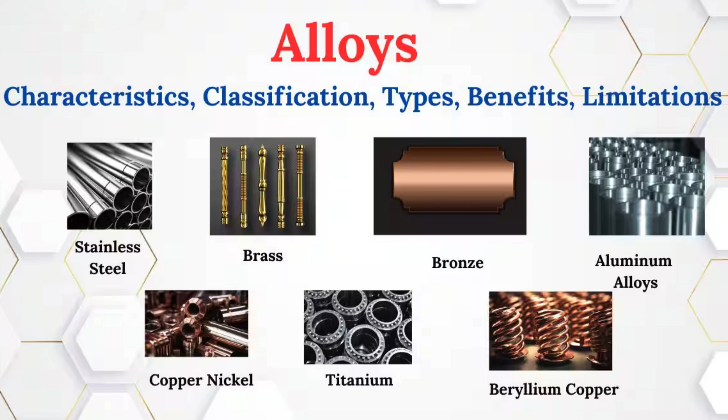Metal alloys are engineered metallic systems in which controlled additions of one or more elements modify the crystal structure, phase constitution, microstructure, and ultimately the properties of a parent metal. From ancient bronze to modern nickel-based superalloys and high-performance titanium and aluminum alloys, alloy development has been central to technological progress. Alloy performance is governed not simply by chemical composition, but by solid solution strengthening, phase transformations, precipitation, grain refinement, thermomechanical processing, and heat treatment.

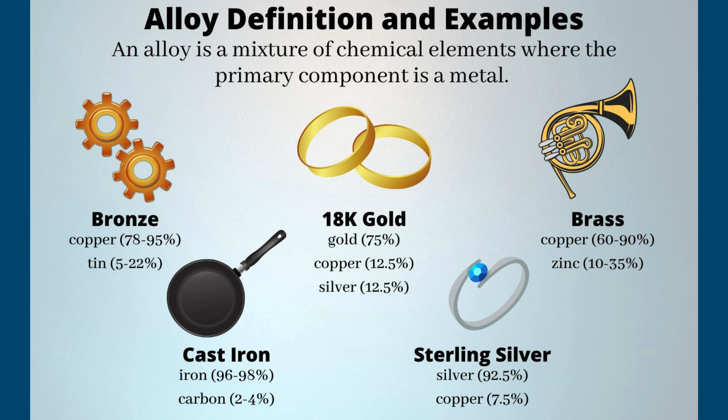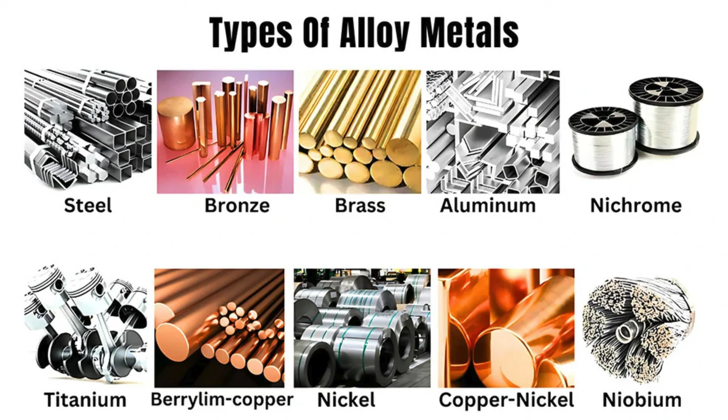An alloy is a metallic material containing two or more chemical elements, at least one of which is metallic. Alloying is fundamentally an exercise in controlling structure and properties. Relatively small compositional changes can alter phase stability, defect mobility, corrosion behavior, strength, ductility, conductivity, and thermal stability. Consequently, commercial alloy specifications generally define not only chemical composition, but also product form, processing condition, heat treatment, and mechanical property requirements.

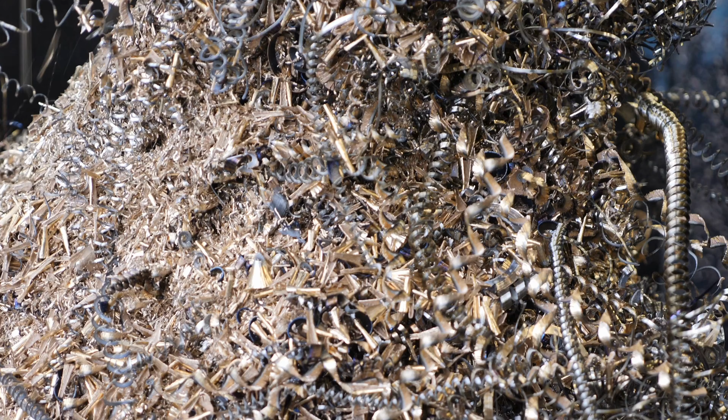The modern understanding of alloys is rooted in physical metallurgy, particularly the relationships among composition, thermodynamics, kinetics, microstructure, and properties. Standard materials science treatments emphasize phase diagrams, diffusion, dislocations, strengthening mechanisms, phase transformations, and processing as interconnected aspects of alloy behavior.

Historical development of alloy technology.

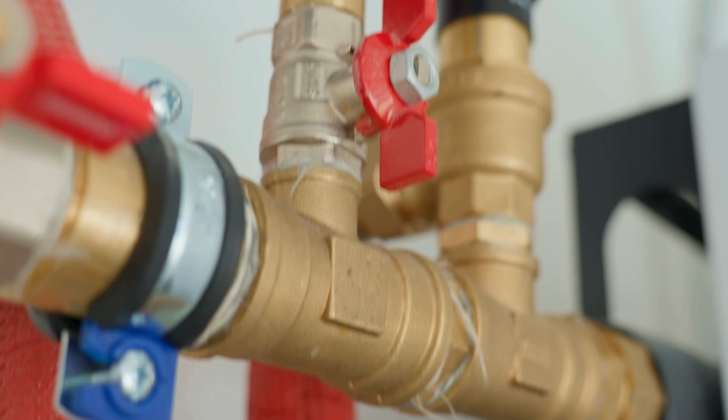Alloy metallurgy predates modern scientific understanding by thousands of years. Bronze, principally a copper-tin alloy, represents one of the earliest intentionally produced engineering alloys and provided harder and more useful tools than copper alone. Brass, primarily copper-zinc, subsequently became important because it combined strength, corrosion resistance, machinability, and attractive appearance. The development of iron metallurgy eventually displaced bronze for many structural applications and established ferrous metallurgy as the foundation of industrial civilization.

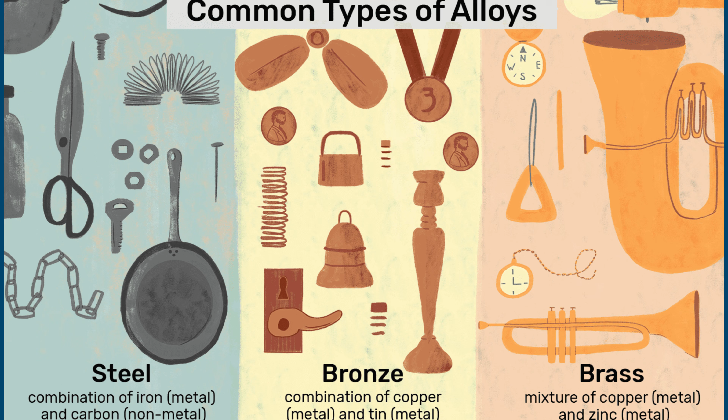The Industrial Revolution accelerated the development of cast iron and steel. Control of carbon content and later additions of chromium, nickel, manganese, molybdenum, vanadium, and other elements enabled steels with systematically tailored strength, hardness, toughness, hardenability, and corrosion resistance.

The 20th century then produced a remarkable expansion of non-ferrous alloys, particularly lightweight aluminum and titanium alloys, and high-temperature nickel-base superalloys. A major conceptual advance was the recognition that alloy properties could be controlled through microstructure rather than composition alone.

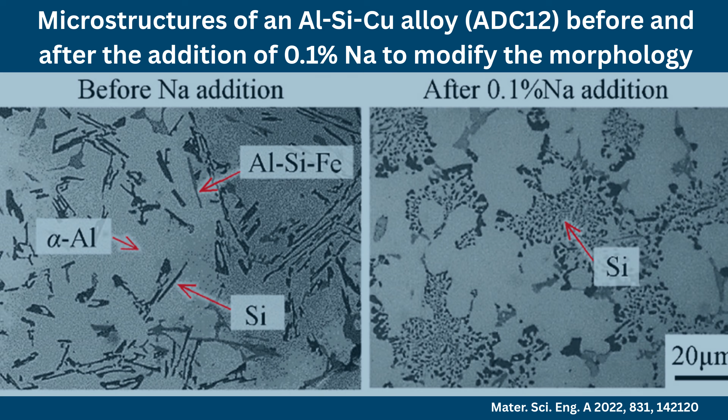The discovery of precipitation hardening in aluminum-copper alloys, associated with the development of duralumin, established a foundation for modern age-hardening alloys. Subsequent studies by Guinier and Preston established the structural basis of the nanoscale Guinier-Preston zones responsible for early-stage precipitation strengthening.

Fundamental classification of alloys.

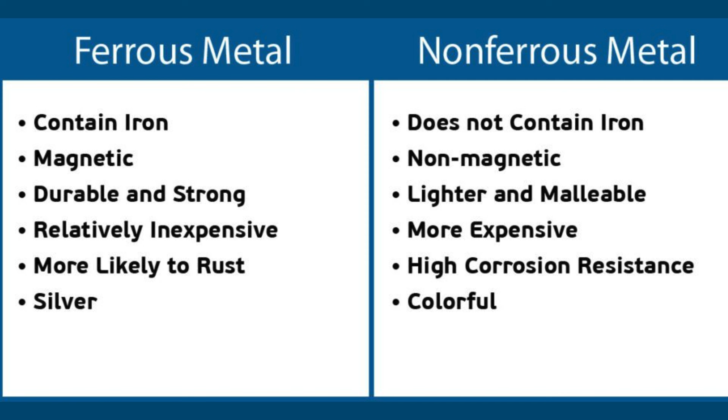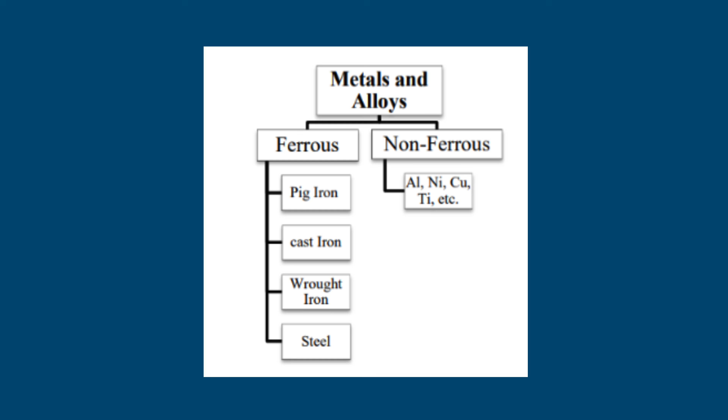Alloys are broadly divided into ferrous and non-ferrous systems. Ferrous alloys are based primarily on iron and include carbon steels, alloy steels, stainless steels, and cast irons. Non-ferrous alloys include aluminum, copper, nickel, titanium, magnesium, zinc, tin, and precious metal-based systems.

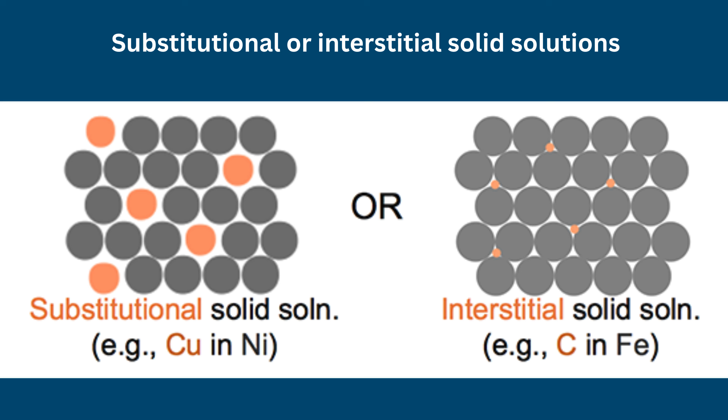At the atomic level, alloying elements may form substitutional or interstitial solid solutions. In substitutional alloys, solute atoms replace atoms of the solvent lattice, as in copper-zinc brass. In interstitial alloys, smaller atoms occupy interstitial positions. Carbon in iron is the classic example.

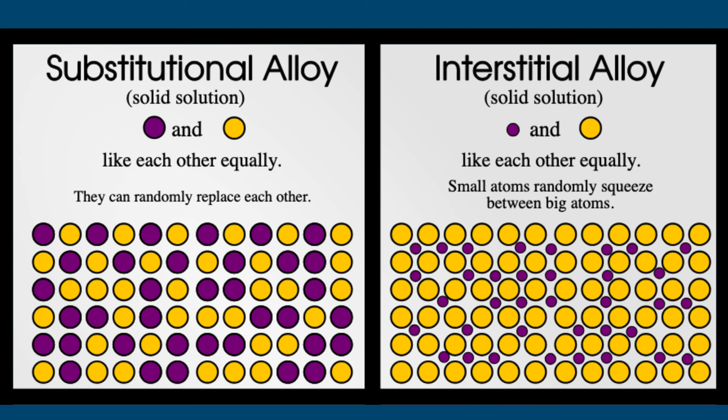The resulting strengthening can arise through several mechanisms. Solid solution strengthening results from lattice strain generated by solute atoms. Grain refinement increases strength through the Hall-Petch relationship, established independently by Hall and Petch. Precipitation strengthening occurs when finely dispersed second phases obstruct dislocation motion. Additional strengthening mechanisms include work hardening, transformation hardening, and ordering.

These mechanisms demonstrate why the processing structure-property relationship is central to metallurgy. Two alloys with nominally similar compositions can possess substantially different properties because of differences in grain size, precipitate population, phase distribution, texture, and defect density.

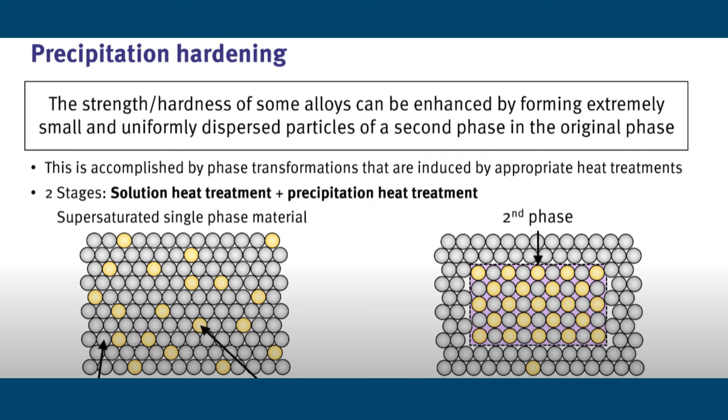Ferrous alloys. Carbon and low alloy steels.

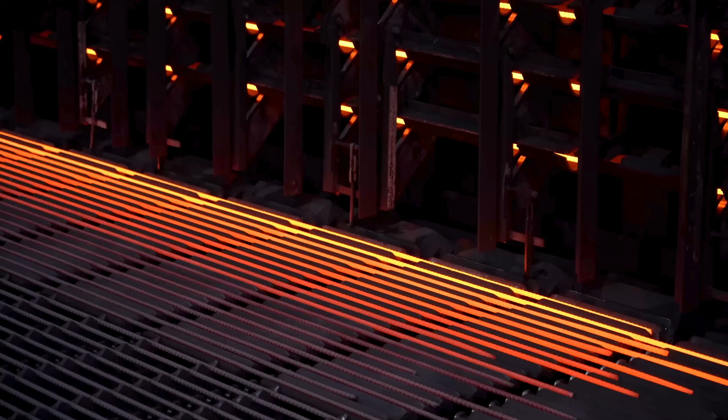Steel remains the most important engineering alloy family because it combines strength, toughness, manufacturability, weldability, availability, and relatively low cost. Conventional steels contain iron and generally less than approximately 2 weight percent carbon, together with manganese, silicon, and, depending on grade, chromium, nickel, molybdenum, vanadium, tungsten, or other elements.

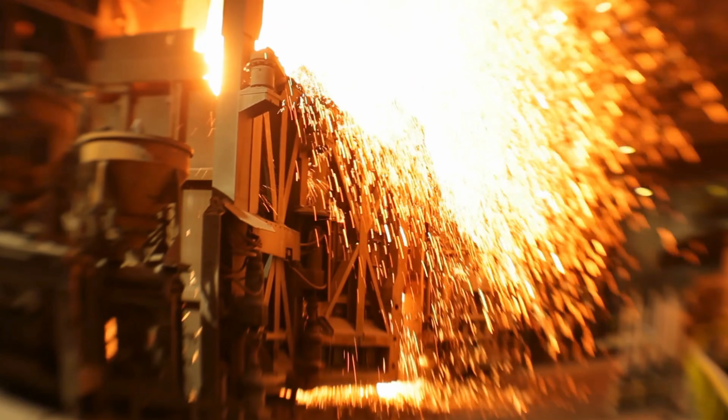Carbon content strongly influences hardness and strength, whereas heat treatment provides extraordinary control over microstructure. Austenitization followed by controlled cooling can produce ferrite-pearlite, bainite, or martensite, while tempering modifies the properties of hardened martensite.

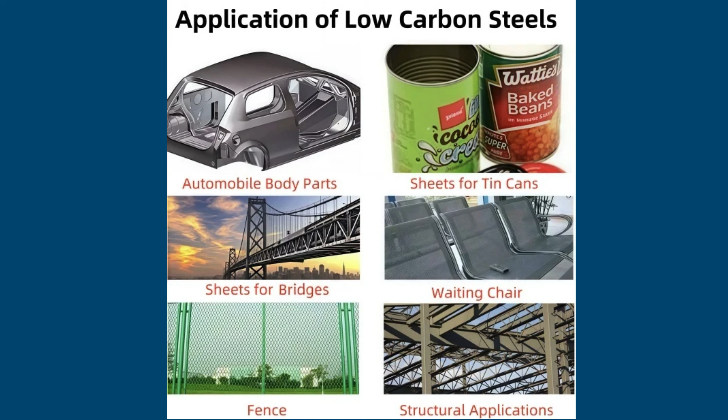Representative grades include A36 structural steel, 1018 low-carbon steel, and 4140 chromium-molybdenum alloy steel. Steels are used in buildings, bridges, pipelines, automobiles, pressure vessels, machinery, tools, gears, shafts, and fasteners. Their technological importance derives not from one exceptional property, but from the ability to produce an enormous range of property combinations.

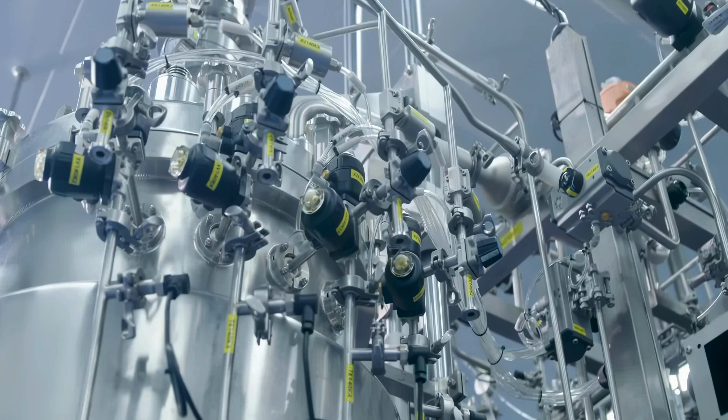Stainless steels. Stainless steels contain sufficient chromium to establish a protective chromium-rich passive oxide film, with typical commercial compositions containing at least approximately 10.5 weight percent chromium. Austenitic, ferritic, martensitic, duplex, and precipitation-hardening stainless steels provide different combinations of strength, corrosion resistance, weldability, and phase stability.

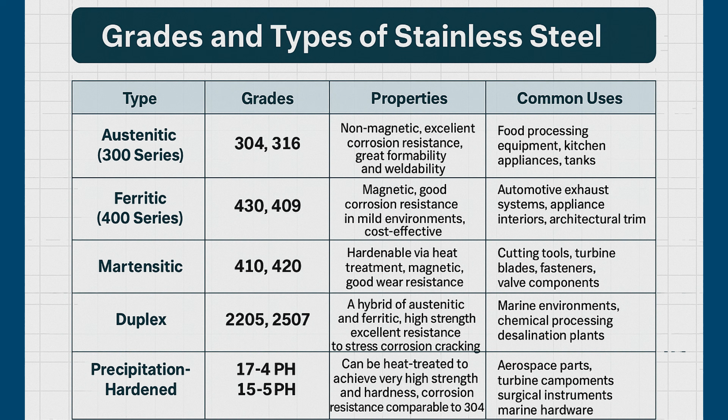Type 304 is a general-purpose austenitic grade, whereas 316 contains molybdenum and offers enhanced resistance to chloride-containing environments. Ferritic 430, martensitic grades, and precipitation-hardening 17-4 PH expand the range of mechanical and corrosion properties available.

Stainless steels are essential in chemical processing, food equipment, medical devices, architecture, transportation, energy systems, and consumer products.

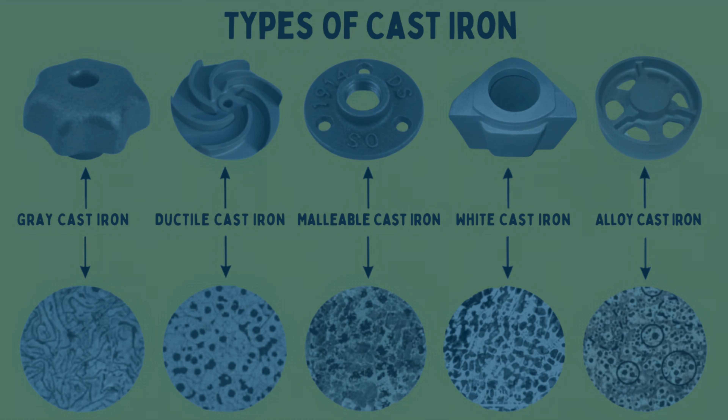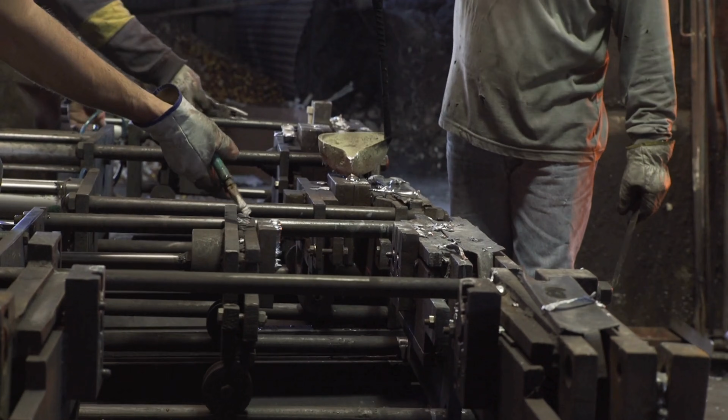Cast irons. Cast irons contain substantially more carbon than steels, typically above 2 weight percent, together with significant silicon. Their high carbon content promotes fluidity and castability, but generally reduces ductility. Gray, ductile, white, and malleable cast irons differ primarily in carbon morphology and matrix structure. Engine blocks, brake components, machine bases, pipes, housings, and heavy machinery remain important applications.

Non-ferrous engineering alloys. Aluminum alloys.

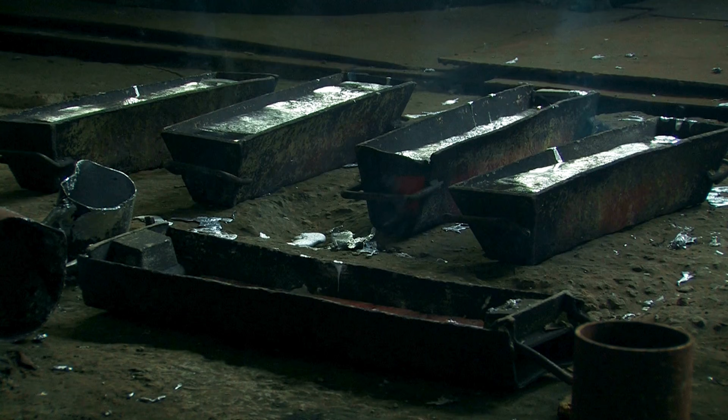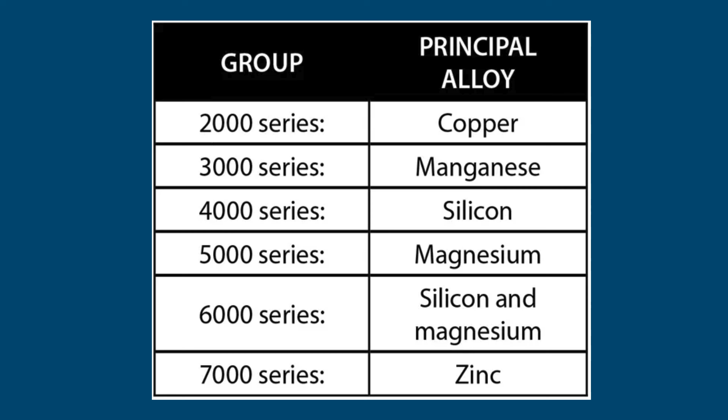Aluminum alloys provide low density, good corrosion resistance, high specific strength, and excellent manufacturability. Major alloying systems include aluminum-copper, aluminum-magnesium, aluminum-magnesium-silicon, and aluminum-zinc-magnesium. The 2000, 5000, 6000, and 7000 series are particularly important.

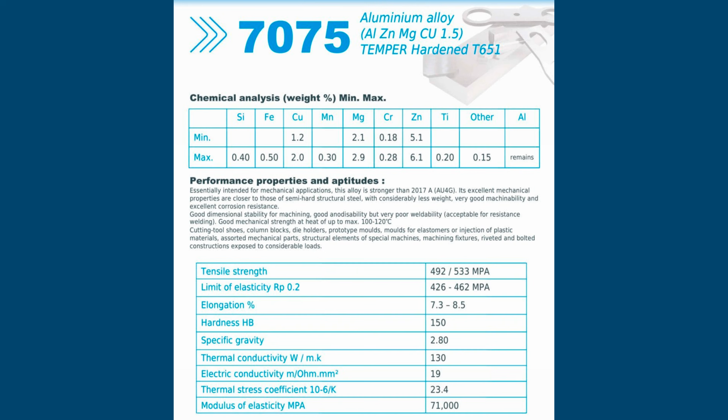6061, an aluminum-magnesium-silicon alloy, is a versatile structural alloy with good weldability and corrosion resistance. 7075, aluminum-zinc-magnesium, offers substantially higher strength and is widely used in aerospace.

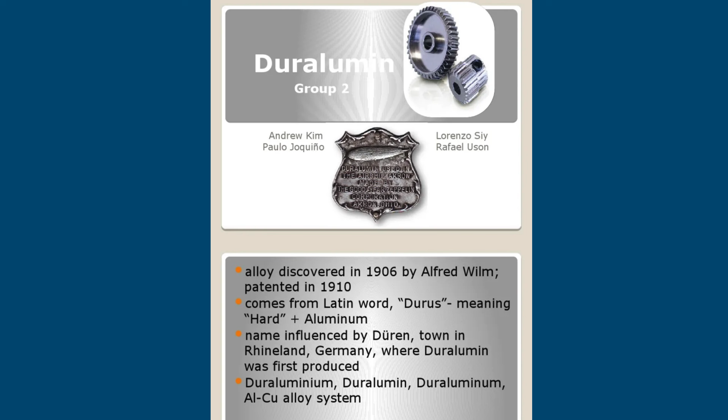Aluminum-copper alloys historically demonstrated the power of precipitation hardening, in which metastable precipitates impede dislocation motion and substantially increase strength. Modern studies continue to establish quantitative relationships between precipitate structure and mechanical behavior in aluminum-copper systems.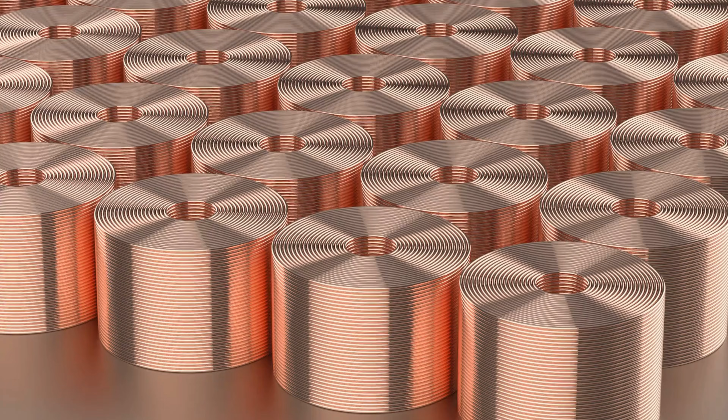Copper alloys. Copper-based alloys include brass, bronze, and copper-nickel. Brass is predominantly copper-zinc, bronze is traditionally copper-tin, and cupronickel is based on copper-nickel. These alloys combine useful conductivity with corrosion resistance and mechanical strength.

Brass is widely used in fittings, valves, musical instruments, electrical hardware, and precision machined components. Bronzes are important in bearings, marine components, wear-resistant parts, and architectural applications, while copper-nickel alloys are particularly valuable in seawater service.

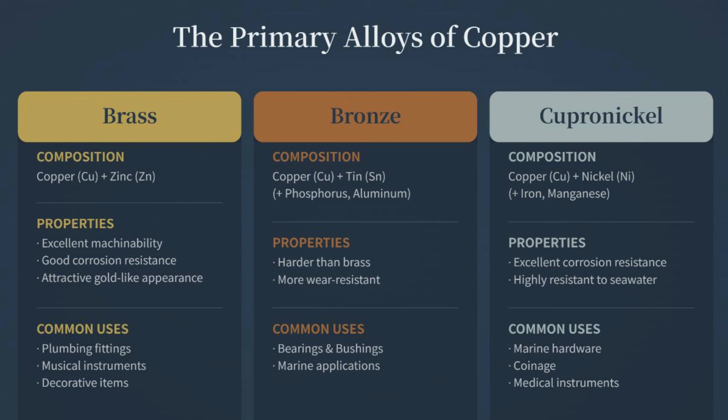Titanium alloys. Titanium alloys occupy an important position where high specific strength, corrosion resistance, and biocompatibility are required.

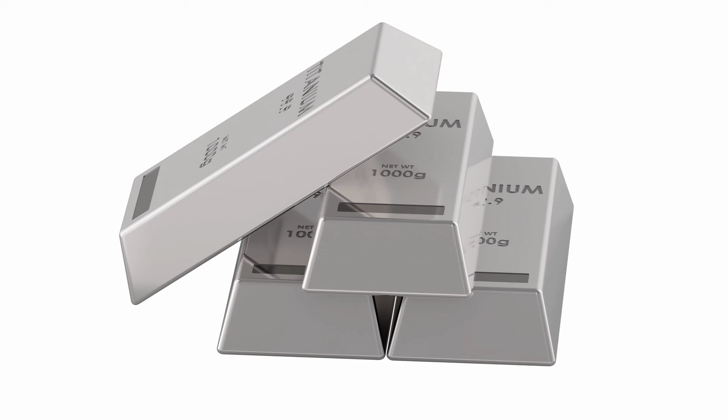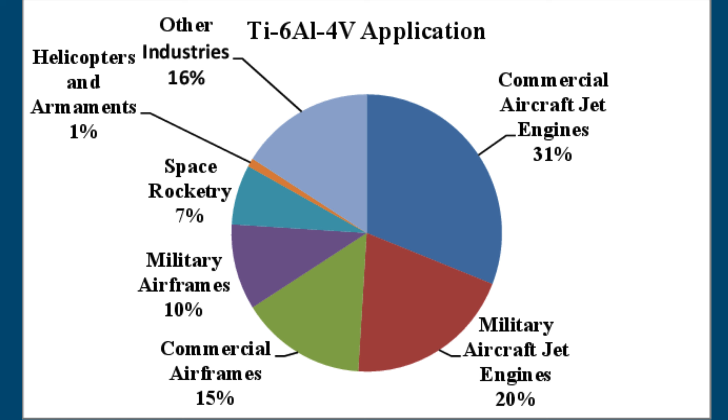Ti6Al4V, containing approximately 6 weight% aluminum and 4 weight% vanadium, is the dominant commercial titanium alloy and is used in aircraft structures, chemical processing equipment, orthopedic implants, and other demanding applications.

Titanium metallurgy is strongly influenced by alpha and beta phase stability. Aluminum stabilizes the alpha phase, whereas vanadium stabilizes beta, allowing heat treatment and processing to produce controlled alpha/beta microstructures.

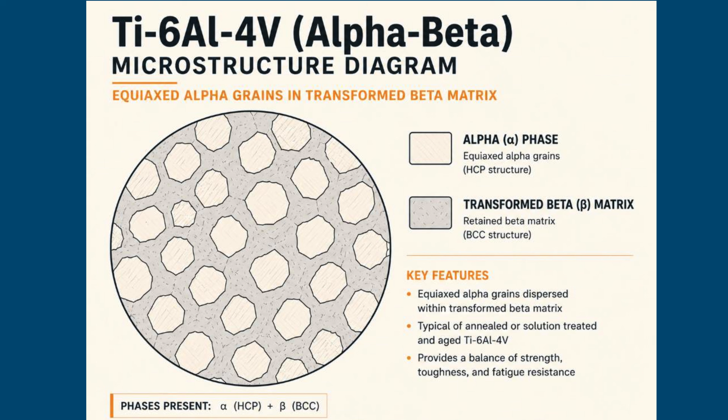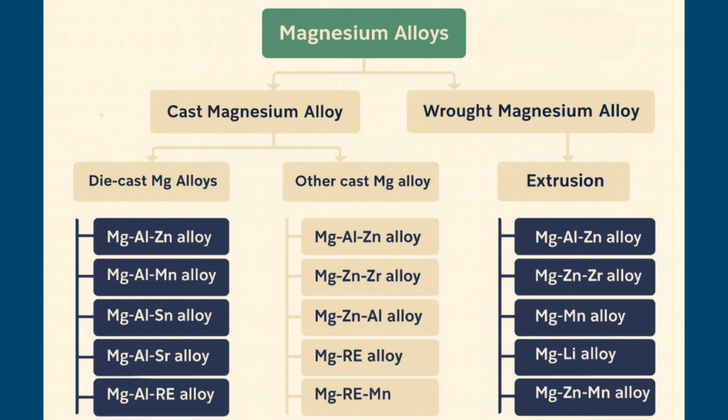Magnesium alloys. Magnesium provides exceptionally low density and is therefore attractive for lightweight structural applications. Alloying with aluminum, zinc, manganese, calcium, rare earth elements, and other additions improves strength, creep resistance, and processing characteristics.

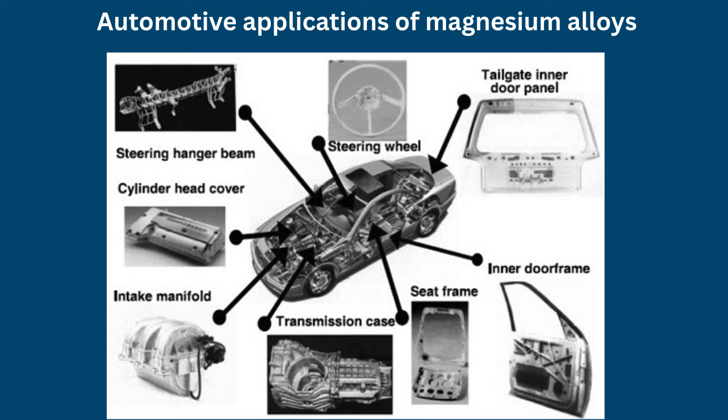Applications include automotive components, aerospace structures, electronics housings, and emerging lightweight structural systems.

Nickel-based superalloys and extreme temperature materials. Nickel-based superalloys represent one of the highest achievements of alloy design. Their compositions may contain chromium, cobalt, aluminum, titanium, molybdenum, tungsten, niobium, tantalum, and other refractory elements.

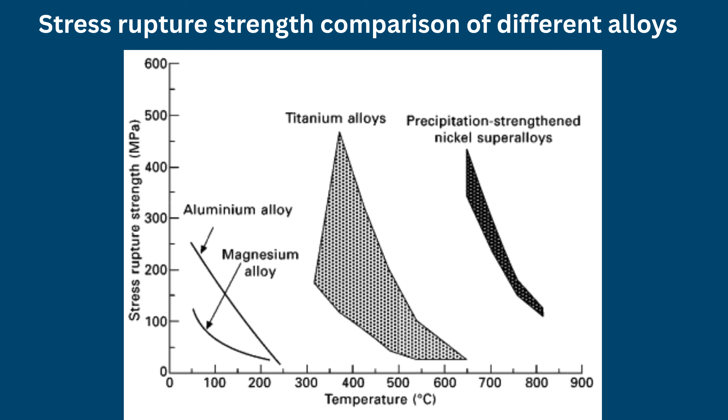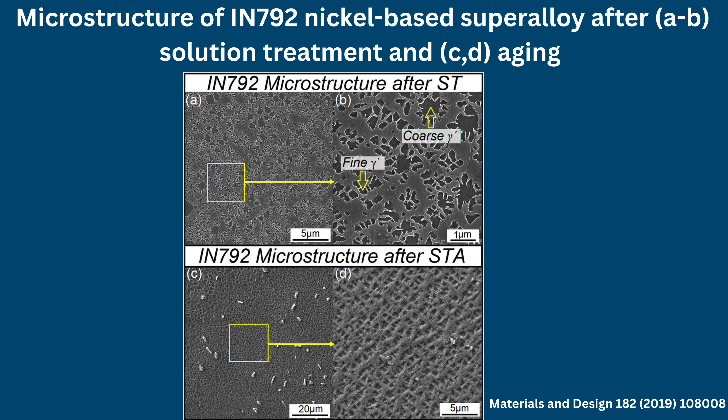Their exceptional high-temperature strength derives from a combination of solid solution strengthening, grain boundary engineering, and precipitation of ordered gamma prime or related strengthening phases within the gamma-nickel matrix.

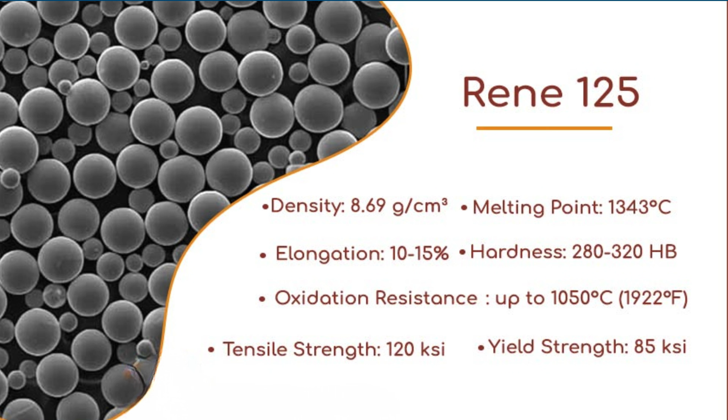Alloys such as Inconel 718, Inconel 625, and Rene family superalloys are used in aircraft engines, gas turbines, chemical processing equipment, and power generation systems.

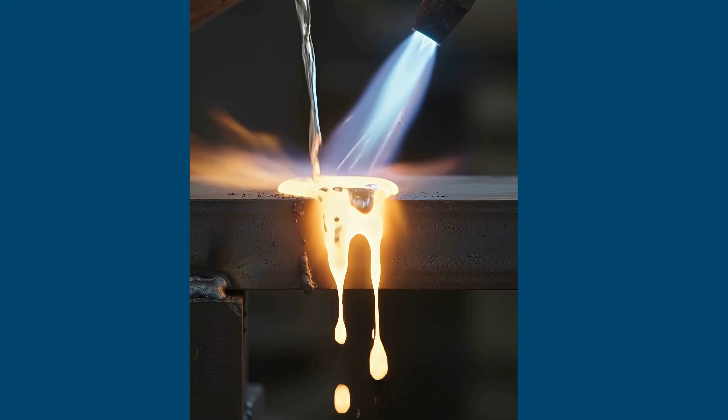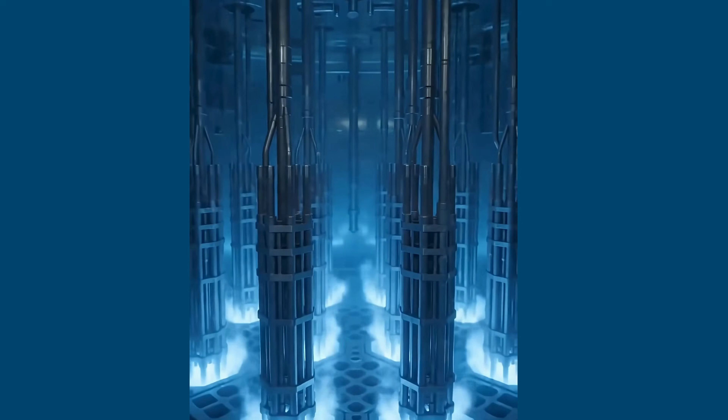Their ability to resist creep, oxidation, and mechanical degradation at high temperatures makes them essential for turbine components operating under severe thermomechanical conditions. Modern superalloy production may involve vacuum melting, directional solidification, and single crystal casting to minimize deleterious grain boundary effects.

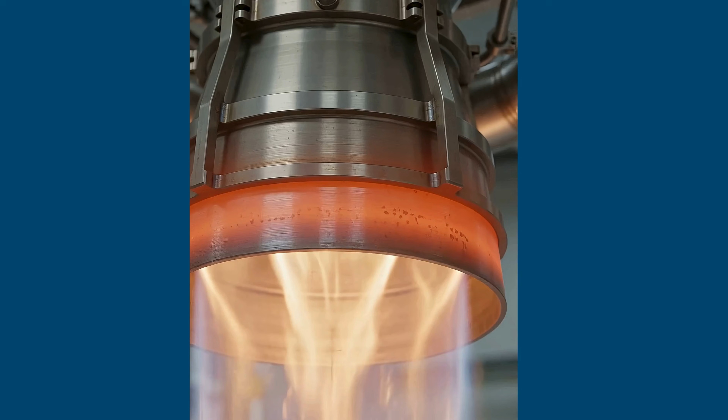Computational and atomistic modeling is increasingly being used to understand phase stability, defect behavior, and deformation mechanisms in these complex alloys.

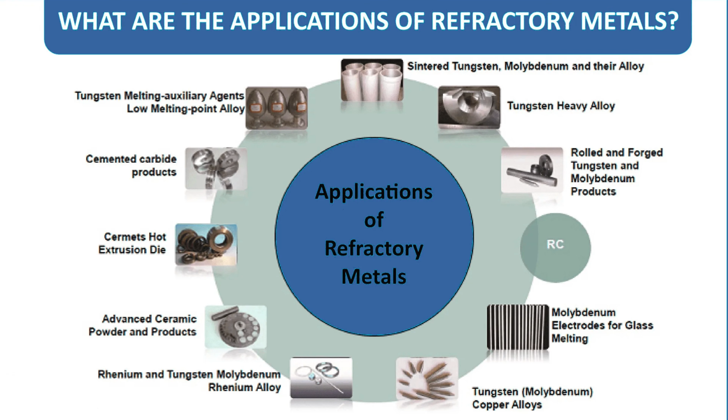Specialty alloys. Refractory metal alloys based on tungsten, molybdenum, niobium, and tantalum provide extreme temperature capability, but are limited by oxidation, processing difficulty, cost, and, in some cases, room temperature brittleness.

Lead, tin, and antimony-containing alloys historically served as solders, bearing materials, and low-melting alloys. However, environmental regulations have substantially reduced the use of lead and cadmium in

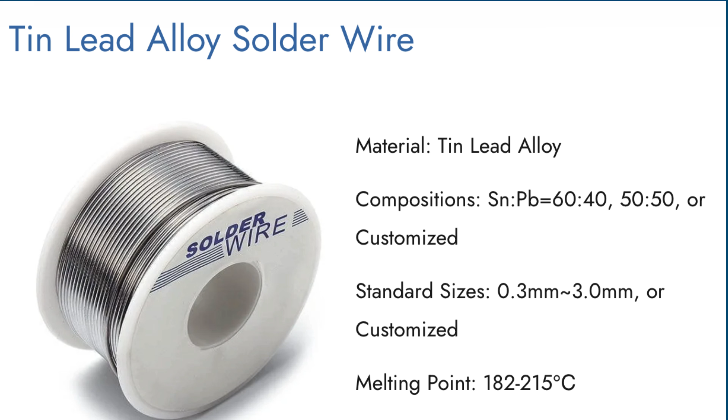consumer applications. Babbitt alloys remain important for bearing surfaces because their multiphase microstructures provide low friction and conformability.

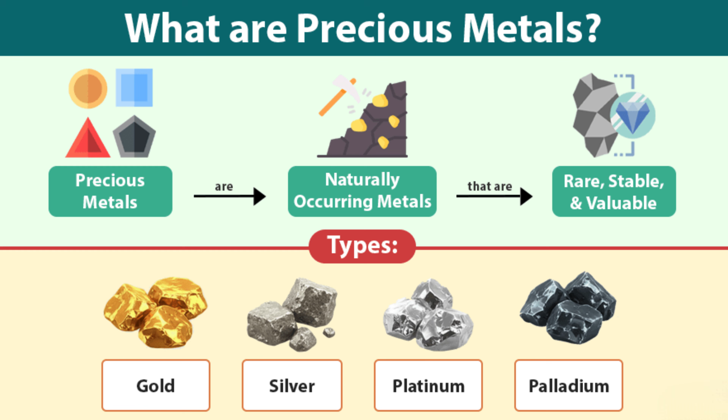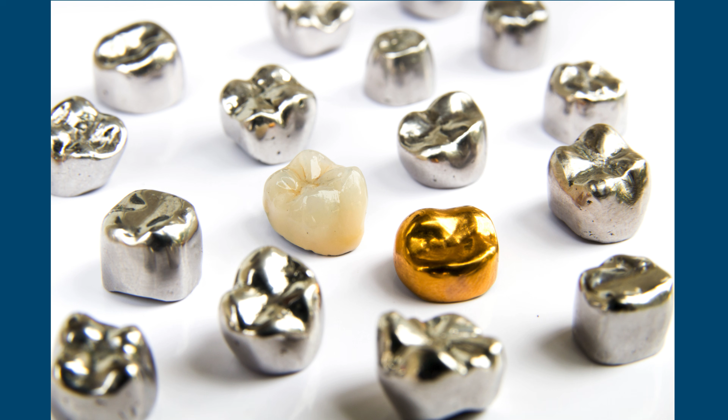Precious metal alloys, including gold-silver, gold-copper, silver-copper, and platinum group metal systems, are important in jewelry, dentistry, electrical contacts, and specialized chemical applications.

Processing, heat treatment, and future directions. Modern alloy design increasingly treats composition and processing as inseparable variables.

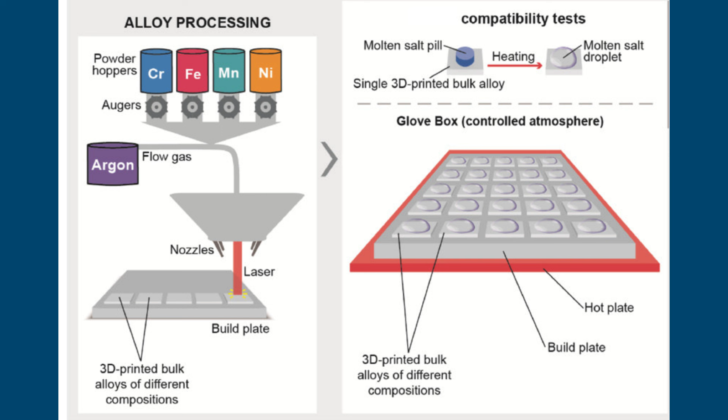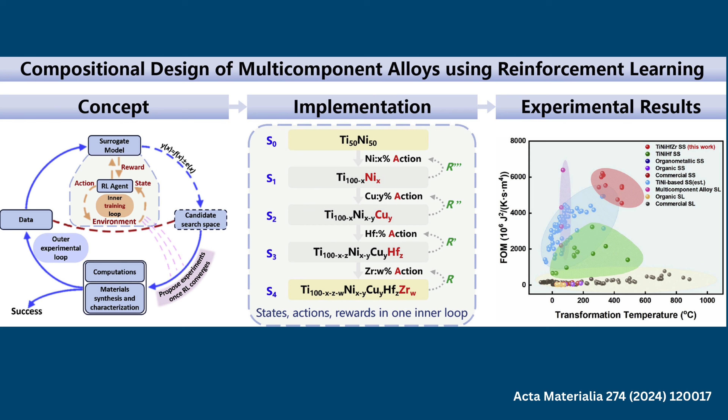Casting controls solidification structure. Forging, rolling, and extrusion refine grains and introduce texture. Powder metallurgy enables compositions and microstructures difficult to obtain conventionally. And additive manufacturing permits geometrically complex components with highly non-equilibrium microstructures.

Heat treatment remains equally important. Annealing, solution treatment, quenching, tempering, and precipitation aging manipulate phase fractions, defect populations, and precipitate distributions. Consequently, commercial alloy designations often specify both composition and temper or heat treatment condition.

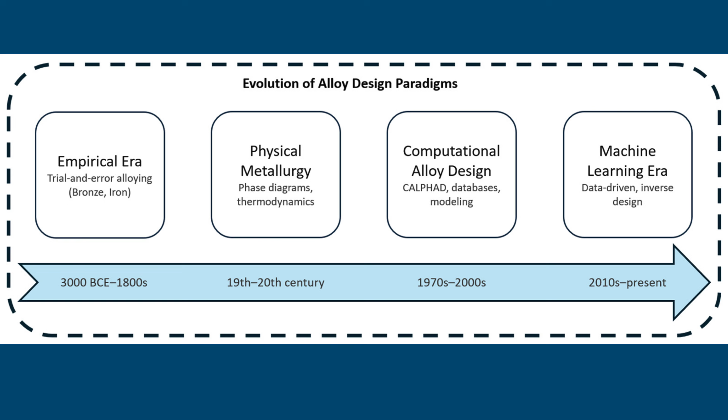Future alloy development is moving toward computational alloy design, high entropy and compositionally complex alloys, additive manufacturing, reduced dependence on critical elements, improved recyclability, and alloys designed simultaneously for mechanical performance and environmental sustainability.

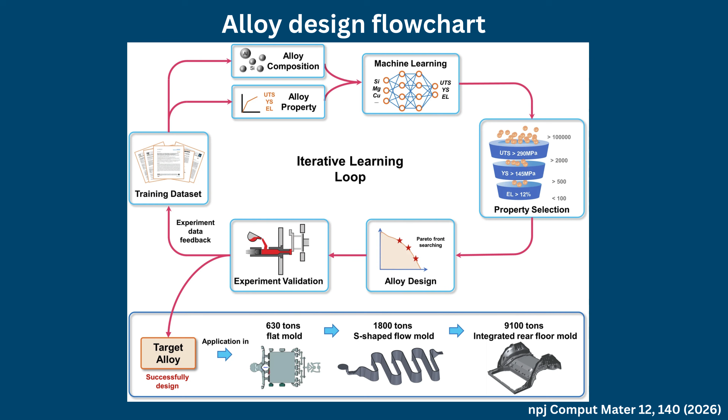Recent research demonstrates that deliberate control of chemical and structural order can generate unusual combinations of strength and functional properties, extending alloy design beyond traditional dilute systems.

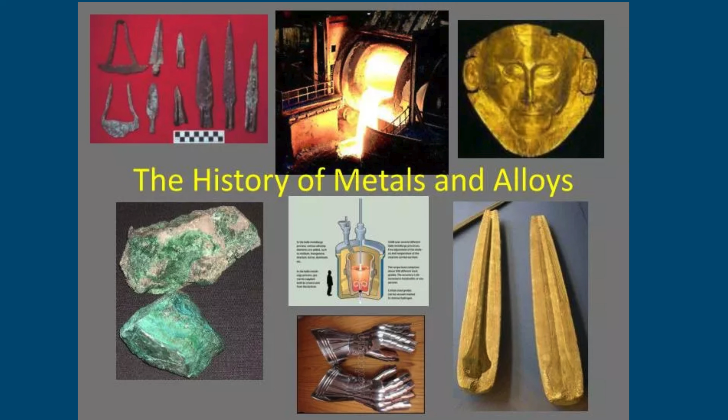In conclusion, metal alloys represent the culmination of centuries of empirical metallurgy and increasingly sophisticated physical understanding. Bronze and brass established the principle that alloying could improve the performance of metals.

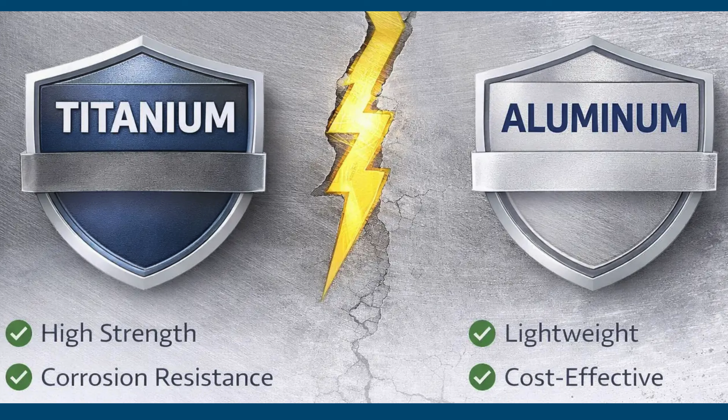Steels transformed industrial civilization. Aluminum and titanium enabled lightweight structures. Stainless steels revolutionized corrosion-resistant engineering. And nickel superalloys made modern high-temperature propulsion possible.

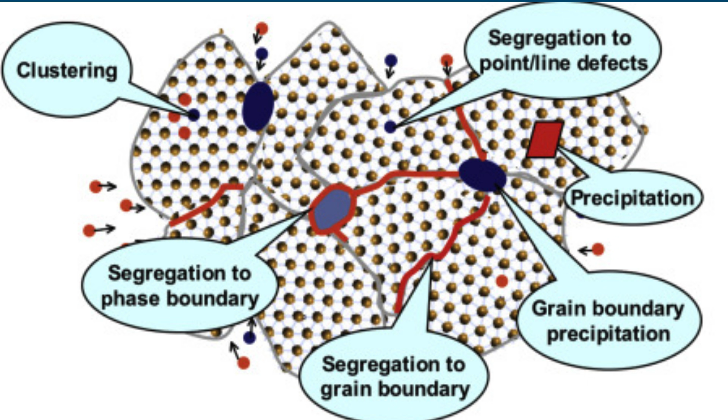The central lesson of modern physical metallurgy is that composition, processing, microstructure, and properties cannot be considered independently. The most successful alloys are those in which atomic-scale chemistry, phase transformations, microstructure, manufacturing, and service environment are deliberately integrated.